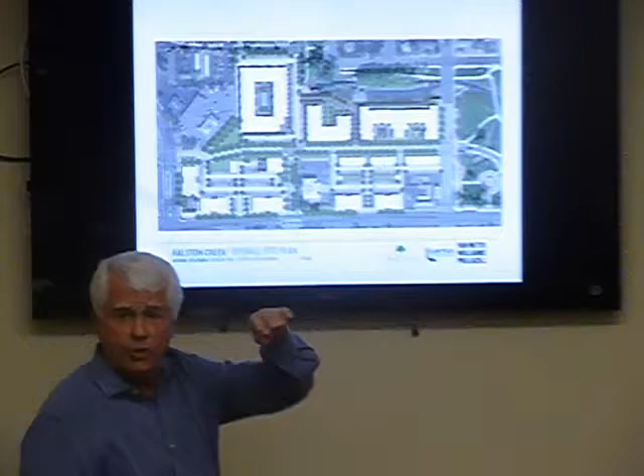I think that in the second neighborhood meeting, this was shown, and everyone kept saying, you're sure you're gonna do the Safeway building and you're gonna do the deal, and we said, yeah, we're sure we're gonna do it. We're absolutely sure we're gonna do it, but it could be, sorry, I'm okay, it could be something that could come up that would change it.

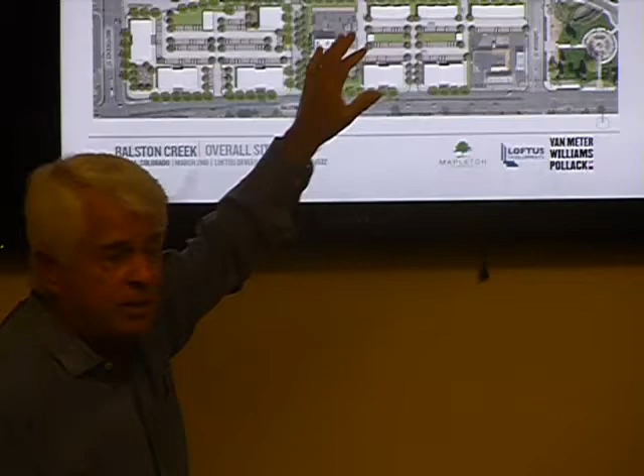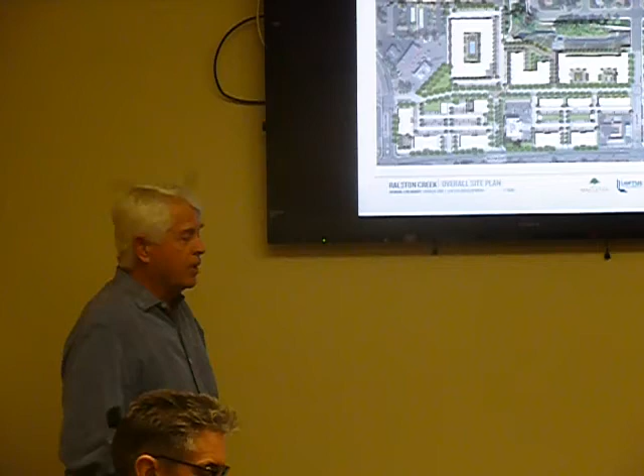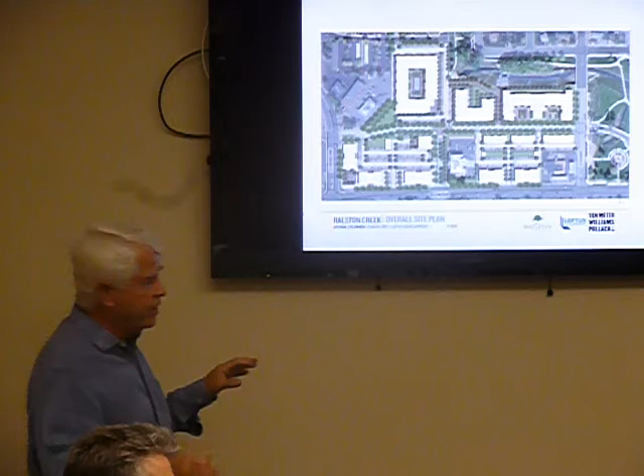And so Tim drew this, which was showing all residential units. What happened as we worked our way down, we got to the end with the lease agreement with 24-Hour Fitness, is that it became totally uneconomic for us, and that we were not driving the deal anymore. They were driving it and trying to drive the rules and regulations for the center and cross easements and how things would be monitored.

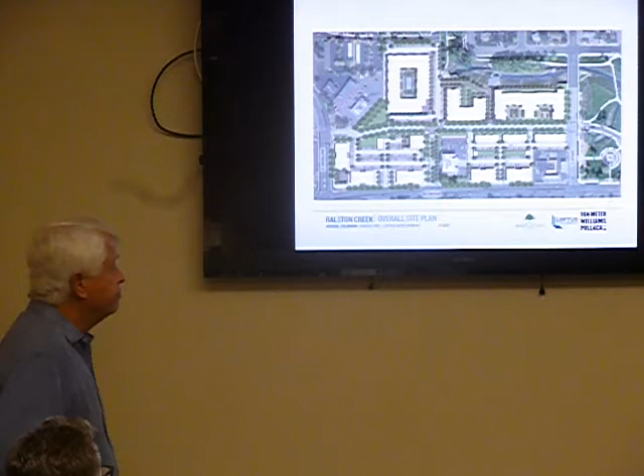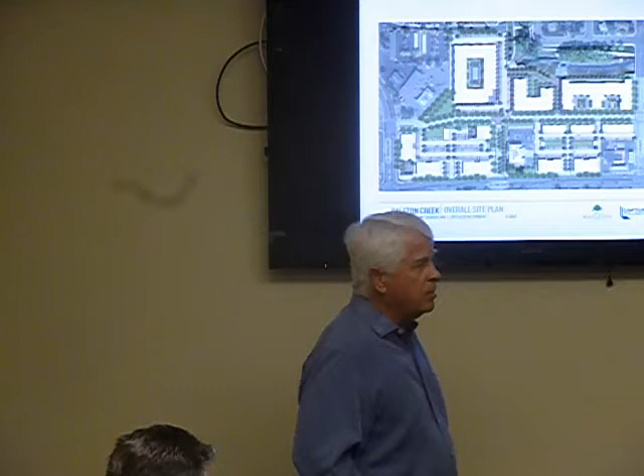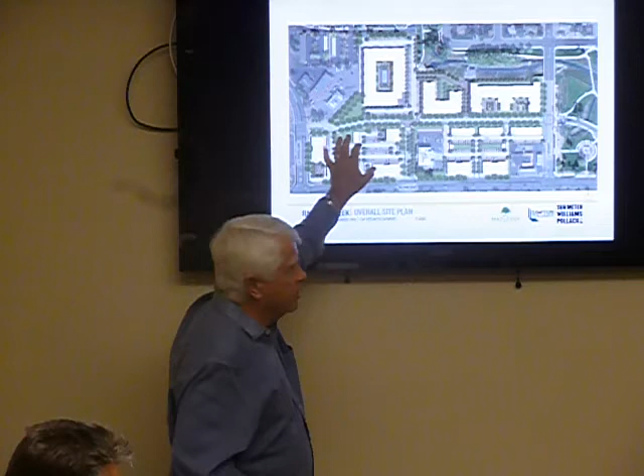And I think when this was drawn a number of months ago, some of these buildings were a little bit smaller. So what we will be going to the city on, to the planning commission on Tuesday, is just this. So, yeah, about 30,000 square feet of phase 1.

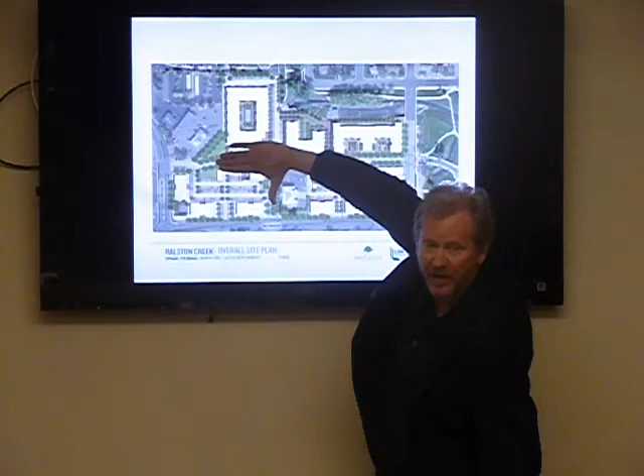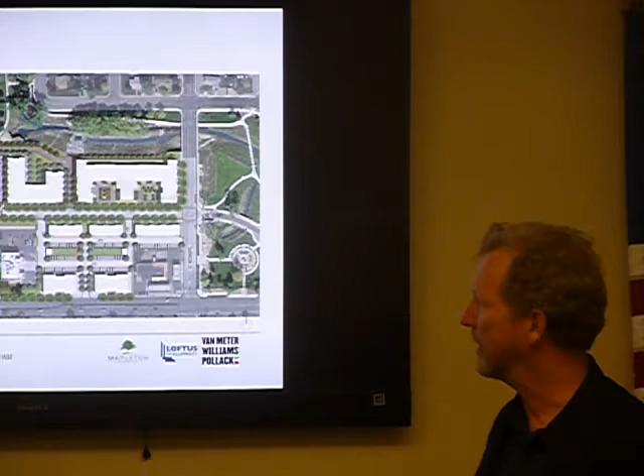So Jim mentioned phase 1 has gotten smaller, which of course means phase 2 has gotten bigger. And so we're working on both simultaneously right now. Where we are right now, as Jim mentioned, come Tuesday, we're down here with the planning commission to move through the jurisdictional approval process. And I'm going to come back to phase 1 at the end of this little discussion, because we need to ask some, we need to let you know what's going on.

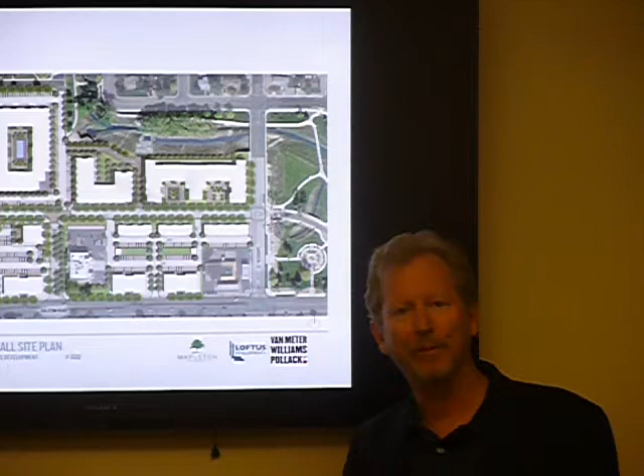We need to ask some help, I believe, on some interesting issues. So we're in technical drawings right now. We call them construction documents for the buildings and for the site, and it's getting extremely fine-tuned and getting very close to being able to put it into the building department to pull a building permit.

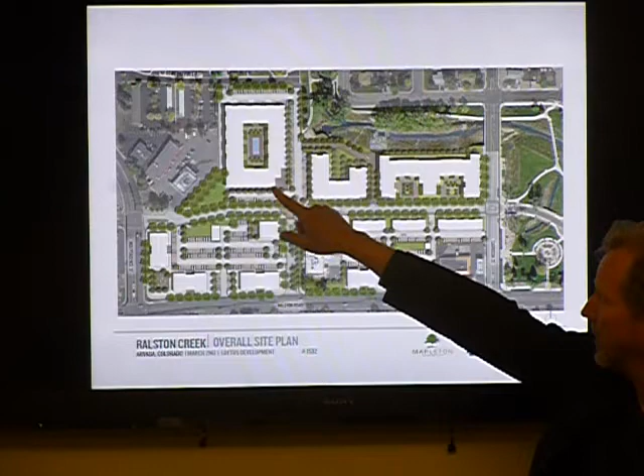So pretty far down the road here. At the time of the death of, I don't want to... of this piece up here, Jim says, okay, let's look at this thing as residential. We did this early drawing for that. But it was more than that, and I'm just gonna show you a progression of the work.

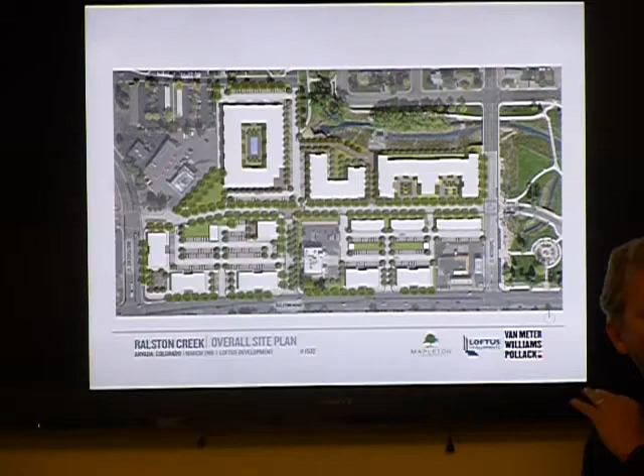The building, the drawings get less and less graphic and a little bit more diagrammatic as we go along. So I just want to show you a progression of our thinking of where we are right now. You know, this funny little sketch was, well, Jim, what happened, and Jim was saying, Tim, what happens if we now place all residential here and this idea of a large format store down at this end now, instead of being over here.

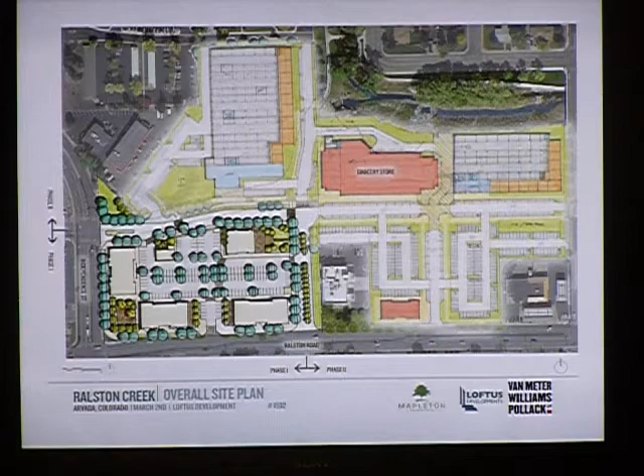And this is just showing a sketch of how it could lay out. What the sketch doesn't show is what's on top of this, which is, you know, dwelling units that's on top of this and here and here.

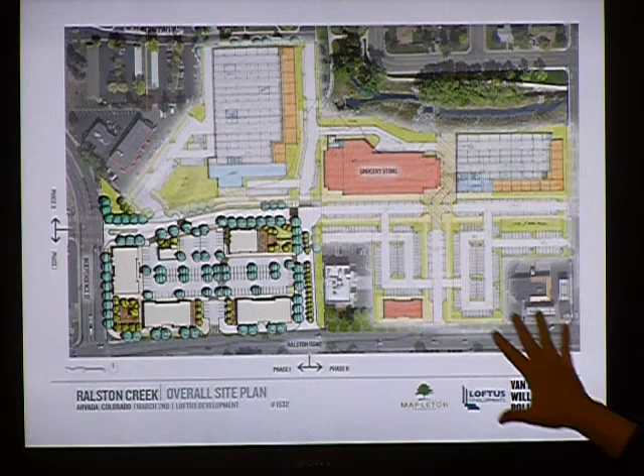So a little bit different configuration. You see these buildings moved a little bit too. And after some discussion, Jim says, hey, let's keep moving forward.

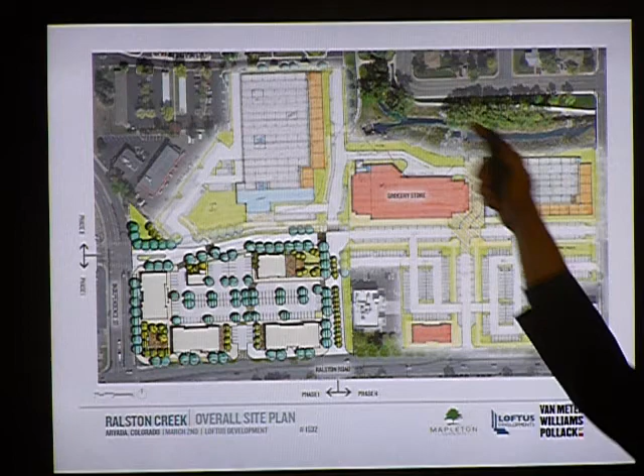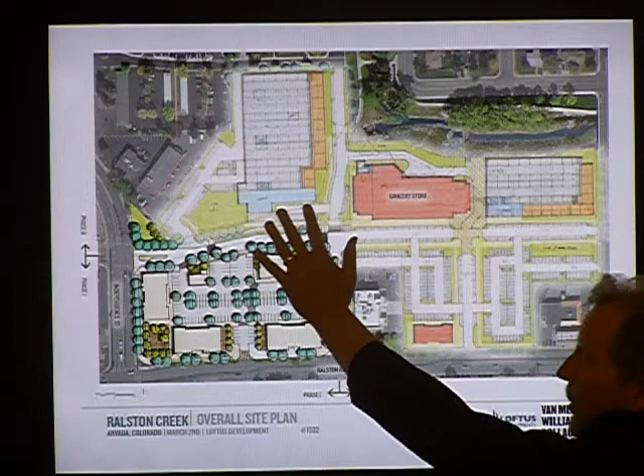So we've moved into a concept design, schematic design exercise for this site. Again, looking at mixed use, a high degree of residential, but also trying to replace our lost commercial component from back over here, to keep in intent with the original intent of this area as a mixed use community.

So now this is where we are just a couple of days ago from a site plan perspective. It looks like a lot of parking, and it is a lot of parking. But what you're not seeing is the high degree of buildings sitting over all this.

So we're right now looking at 4 fairly large buildings, named very stealthily 7, 8, and 9. And this one we haven't put a name to yet because Jim doesn't like it yet. But we're still working on it.

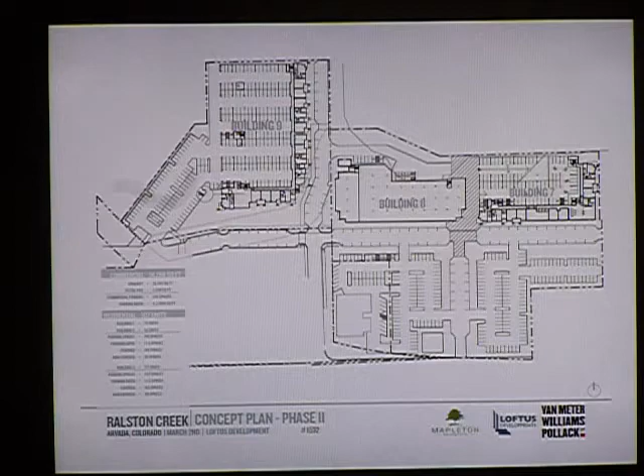But we're looking at about 300 dwelling units here now. And not just 300 dwelling units, but I believe we're up to 35, 36, 37, 38,000 square feet of retail to bring back to the site, again in conjunction with what's happening over here in phase 1.

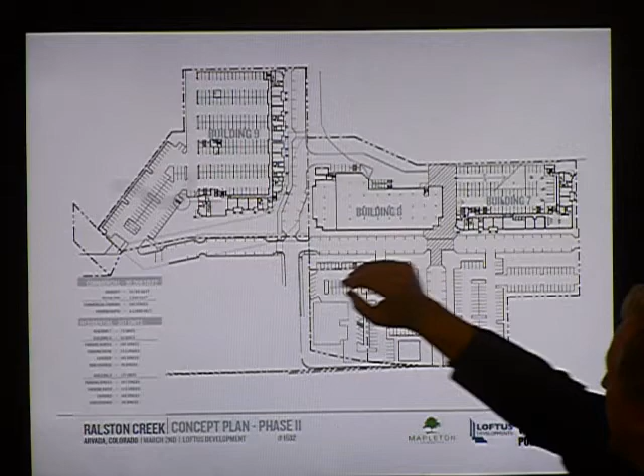So we're looking at a fairly robust set of buildings on the back here, residential, mixed use and residential, and then the parking facilities for the residential, which are covered for the most part in structures or parking podiums, and then a parking field that sits in front of our mixed-use building at this location. I'll just go through these quickly so you can see what we're up to.

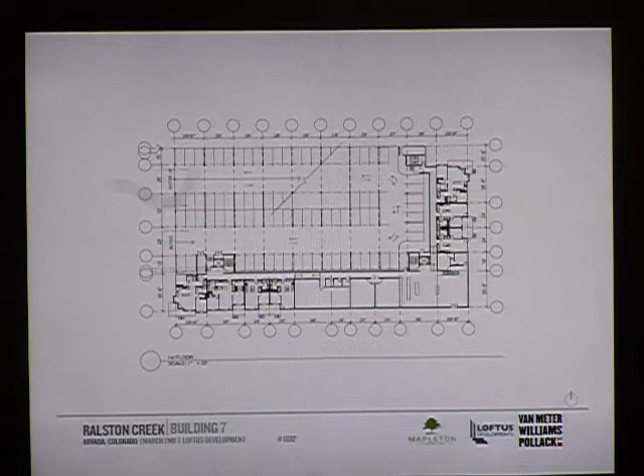First building, 7, when we go back, I'm going to move from here to here. Building 7 was the Parkside building. This is going to hold a major amenity package for the residences. That will be here, and that's what you're seeing on the first floor.

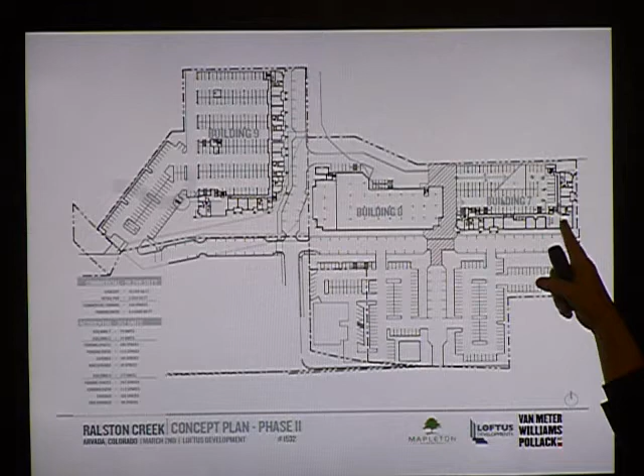So the intent is to feel like a retail building with residential above. Though the majority of our lobbies, small theater, workout facility, and the things that come with these type of things, we're putting on the park side. So this relationship over to the park here is very important.

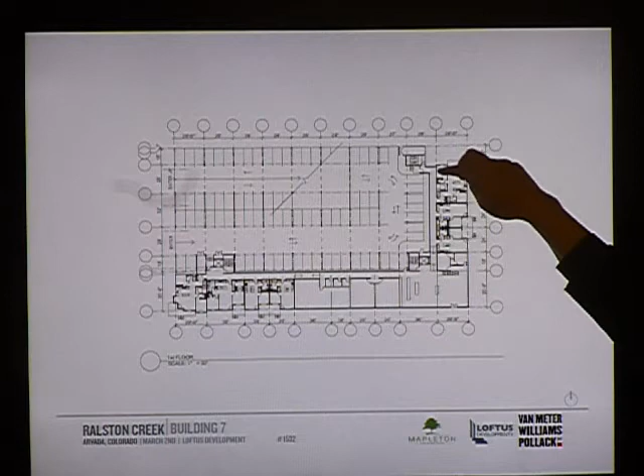And this building's kind of shaping up like this. So you're seeing a series of what we call liner buildings. Again, like what we've done over here at the park here in Old Town, putting a series of walk-up residences here and here, with our major amenity package sitting at the corner.

And what that's doing is masking a fairly large amount of parking, a 2-deck parking structure sitting up here. This goes up 2 levels like this. On the second level, this fills in with residential up here. And then we get up on top to a podium level, which will have a large podium deck.

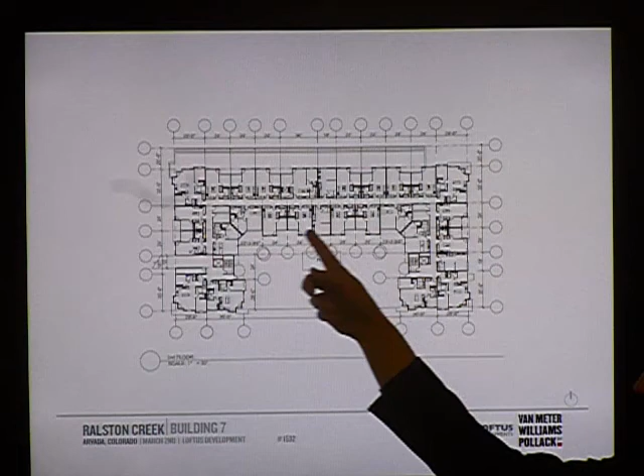2 levels up in the air, so the views will be spectacular. Drop a pool in, have a series of amenities, fire pits, and outdoor eating areas and things like that for the residents that now sit in this building.

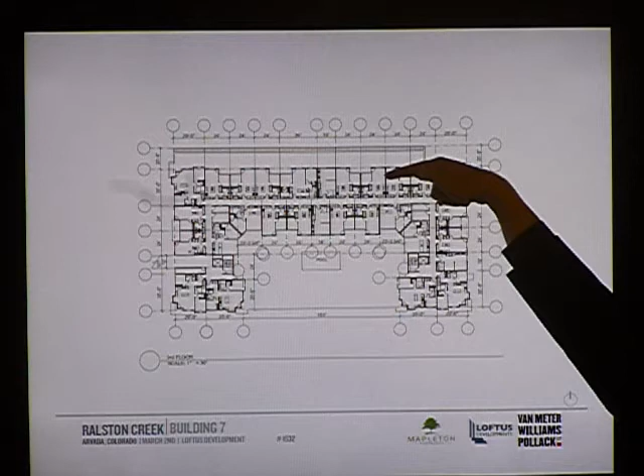The residences do sit back about 20 feet from the edge of the building. That's the parking below. So we start modulating back away from the creek side to give the building some edge and some form to it.

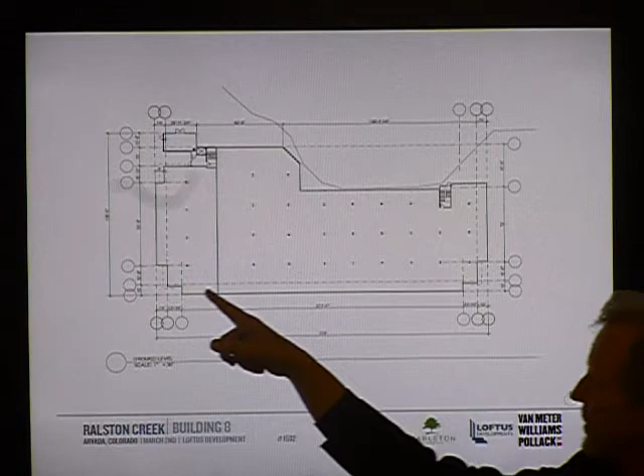The mixed-use building is a large retail space, and right now, potentially a food provider here, with storefronts along the front, maybe a major glazed entry here, smaller user at the corner here, a sub lobby here for the residences adjacent to the old Safeway building now.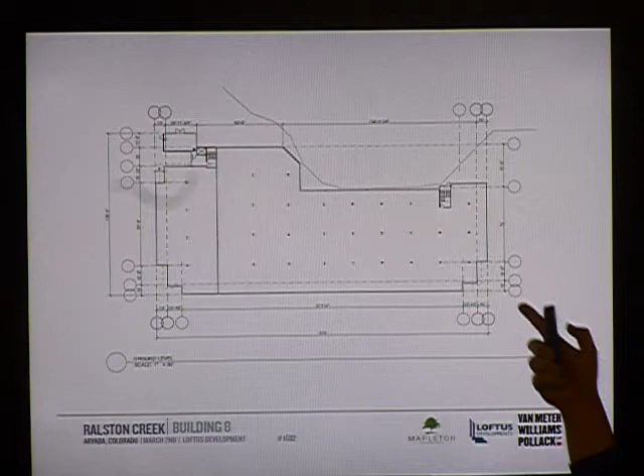This little funny line you're seeing in back is our 100-year floodplain, so we've got to be out of that. It's starting to shape the building somewhat coming across. But it's a high degree of glazing across the front here.

To activate that, we have 2 levels of residential sitting on top, double loaded corridors, a series of 1 bedrooms, 2 bedrooms, and a few studios. We set back 10 feet on the front side here to really give the retail a pronounced effect.

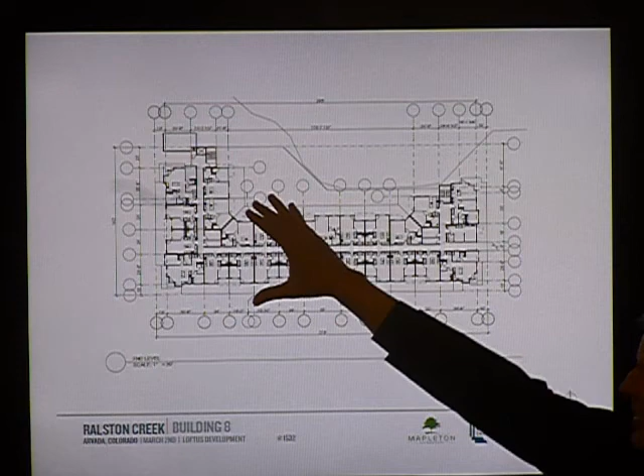And again, it sits right next door to Building 7, which is also a fairly robust building form, so we're starting to add some critical density and critical activity to help activate these retail spaces. Last but not least is a really interesting building, kind of turned with north this way, what we call Building 9, which is a large parking podium to cover parking, so each resident will have a covered parking space underneath.

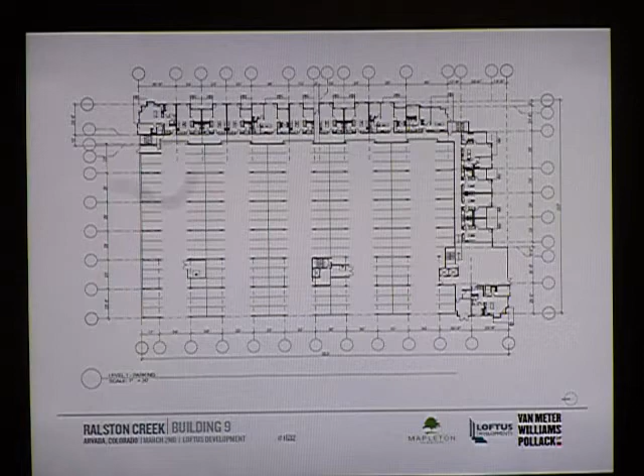Again, lined with walk-up housing. By walk-up, I mean you're outdoor, you come up into a porch and up into the unit, or through a corridor through the back end. Coming down here, that faces out towards our phase 1, and again a sub-lobby level right here. This is fairly remote from Building 7, so we do have some amenities right here for Building 9.

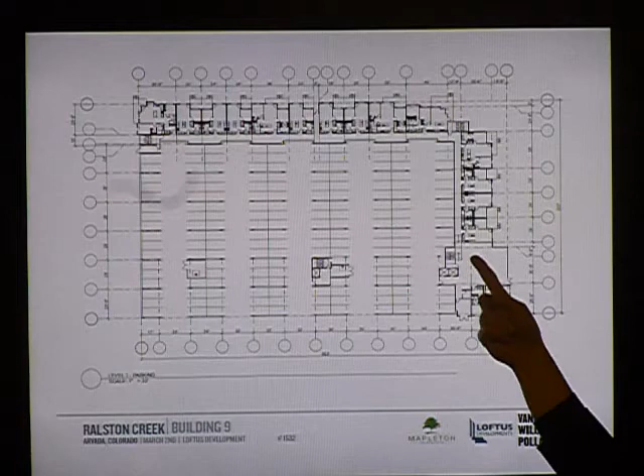It moves up and creates a really unique shape of two very large courtyards—very large. Have most of you been to Park Place and seen those courtyards? These are double the size. One facing due south, looking over phase 1, one level up in the air, and this one looking right down the spine of the watercourse-way, Ralston Creek. Again, these will be heavily amenitized like at Park Place with a variety of uses out there.

And we go up 3 stories just like this. So right now we're sitting at about 307 dwelling units, a variety of dwelling types—ones and twos and studios for the most part—covered parking, and about 38,000 square feet of commercial retail opportunity within that.

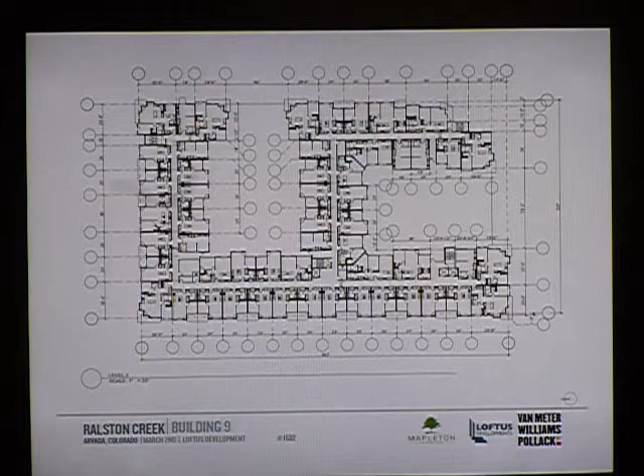I'll go back to the site plan here. I know it's not sexy, but this is just printed right off our computer about where we are today. We're moving forward in a fairly aggressive design pattern right now. I'm looking forward to trying to get a PDP maybe towards the middle to late parts of April, first middle, for the full development.

So before I go on to the really interesting discussion, do you have any questions about this that I can help answer?

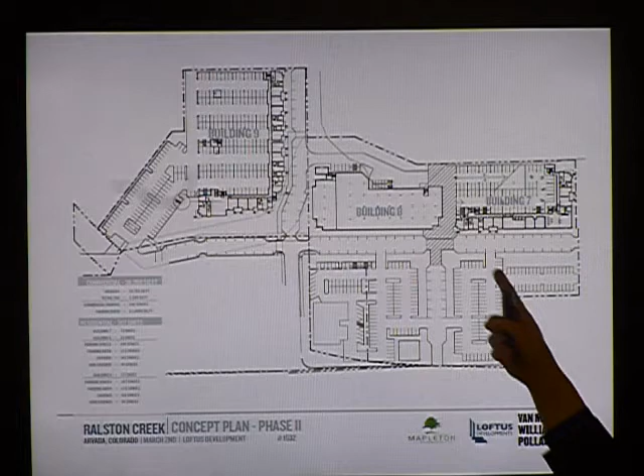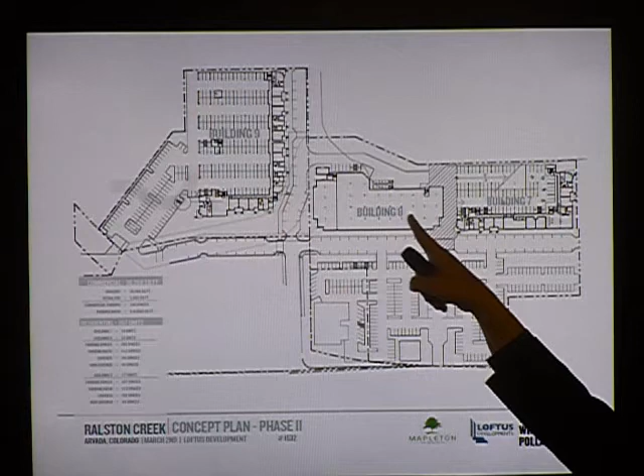So the rest of it's just parking. Pop it up here—this one right here? Yes, that's parking, that's all parking. The thought is we need a few more parking spaces. We're not getting into the structure; this would be reserved for the residential at this point. The little site just to the west of that is just surface parking as well, because this is all serving this—parking at about 5 spaces per thousand. We're keeping a good view corridor back to here, because as a fairly large user we need to be able to pronounce it back out to Ralston. This is the urgent care facility, and we have a co-share parking arrangement with them at this point.

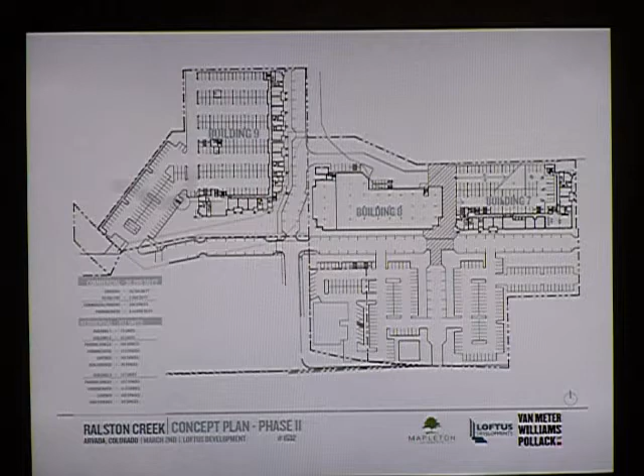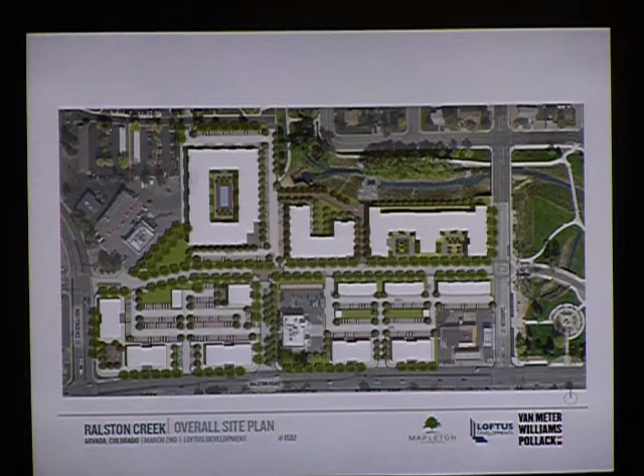What's the street situation going through there? It's a street situation, parking on both sides, necking down to about 24 feet wide—just enough for a fire truck and two cars to pass by, at a 5-10 mile an hour condition. Going back to the original site plan, that street really remains the same throughout, shown by the color lines. So it'll be the same throughout the entire process, but now we're getting into the details of the building, so we can figure out what the yield is and how to park it.

It just appeared narrow. Well, it is rather narrow, and the intent is it's very slow moving, with parking on both sides.

So phase 1, are you still anticipating buildings fronting Ralston? Yeah, this is where we are.

And then for the eastern part, buildings 7, 8, and 9, where the parking is. So now we don't have the buildings fronting Ralston, that's gone, now it's smaller buildings and parking. Right, because the majority of what we were showing previously, we did not have retail back here. We had retail all up front, and we co-located back here so they get a larger user back there.

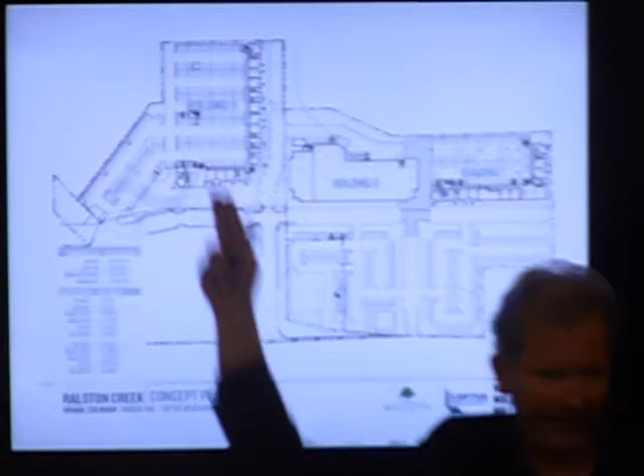And then you use the term covered parking, is covered and structural parking the same? Yeah, this is a parking structure, it's 2 decks. This is a parking podium, it has a concrete lid over it, and that's what gives us our courtyard.

So we feel there's no restaurant capability on the east side of the property facing the park at all? We've got the residence parking right now. Oh, right here? So there's no restaurant possibility anymore? Jim, did you hear that?

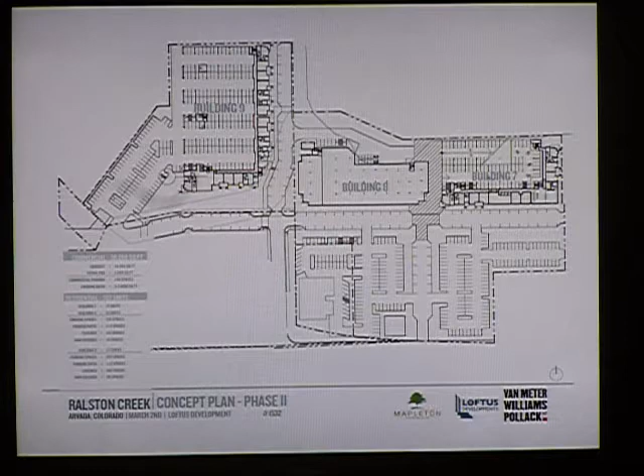You want to answer that? Well, right now we're not showing anything there because in order to park the residential, we're about 30-some spaces short of what the apartment brokers are suggesting is the ideal parking arrangement, which is 1.5 spaces per unit average, and we are at about 1.4 something. In terms of something being planned there of some significance, we've kind of taken a pass on it.

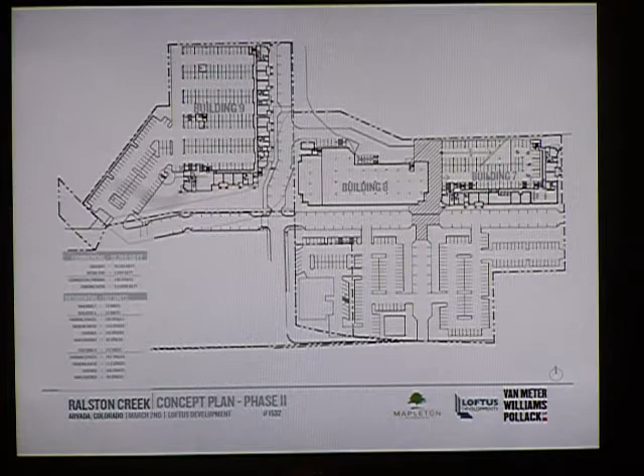Because of the gas station and not exactly knowing the future of the gas station. It is different around the country.

If you were to point to the corner of Building 7, just where the entry is, could there be a coffee shop there? In my world, it would make more sense to have a coffee shop there, inside the building, than behind the gas station.

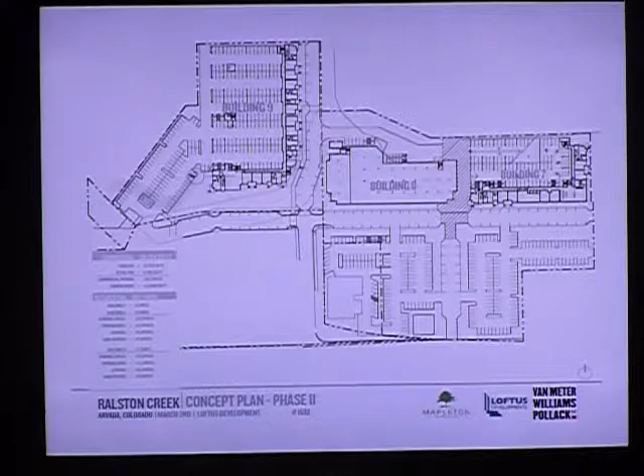Yeah, the gas station is problematic for any kind of buildings, just because it's unpredictable how long it's going to be there. It's just a real eyesore. Nobody wants to be next to it.

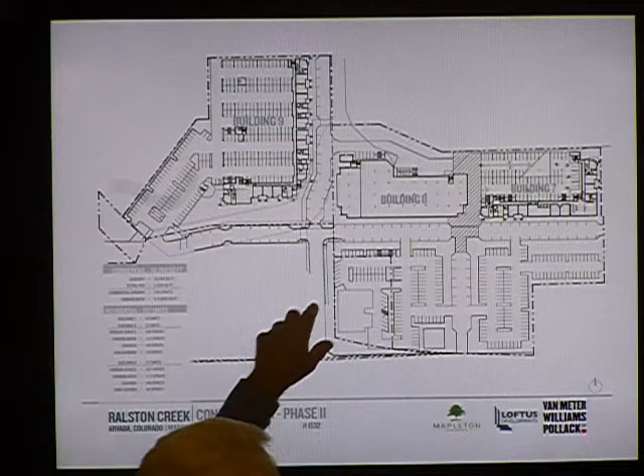So what we're thinking is that this is 2 users. This is a 30,000-foot user, and this is 5,000 or 6,000 feet.

Essentially the height of the trusses and so on is about what it would be if you were inside a Safeway store or a regular grocery store. I think we started talking about 16 feet, and maybe that is 18 feet. I don't know, but that would be grocery store height.

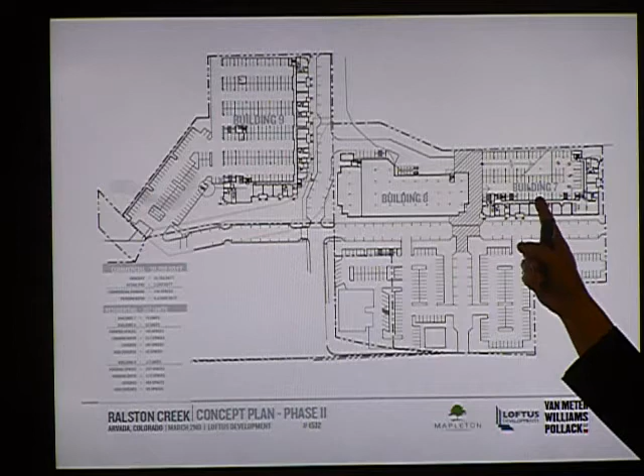These connect across in a bridge. Yeah, these 2 buildings connect, levels up in the air. Residential connects across the drive-through area there.

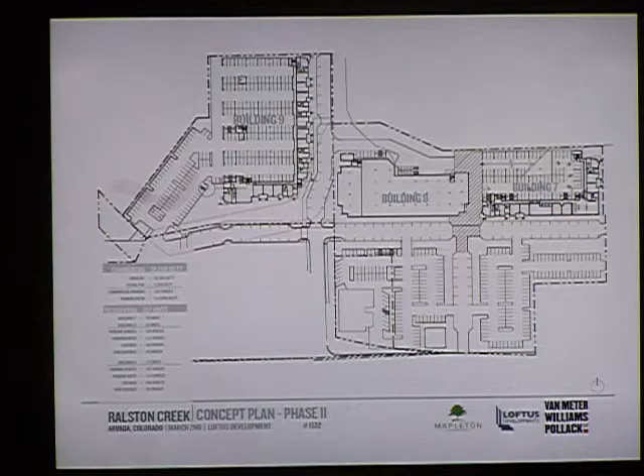And I can't say that we know of anybody that definitely is gonna go in that building, but we've kind of targeted some people that we think we're gonna go after, and one we've already contacted about going into that building.

So we've gone from having some of these buildings here to trying to get a kind of user that everybody's gonna appreciate. Maybe it's food, that also complements all the small users.

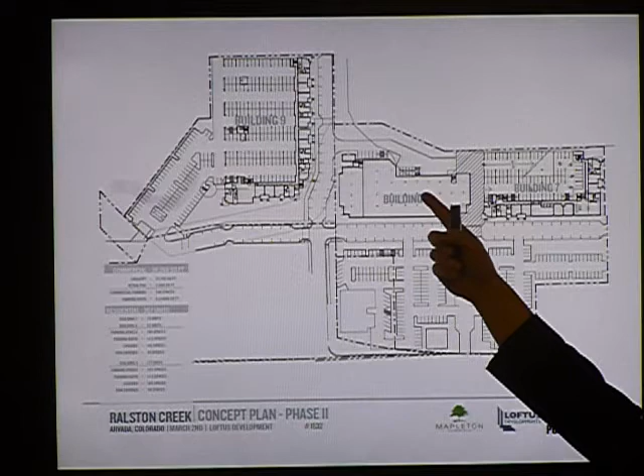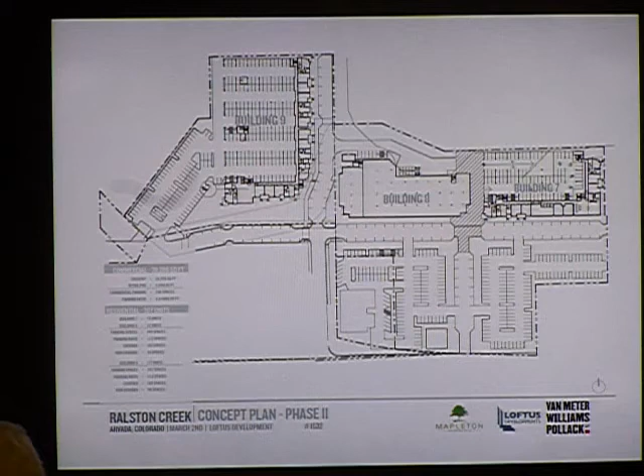Yeah, I mean, I don't think we'd want to put anything over here that competed with these guys, because we spent so much time trying to reduce footage, take away footage, because these are mostly restaurants, Cadova and people like that are interested in this stuff up here, and they want visibility, signage, and very convenient parking.

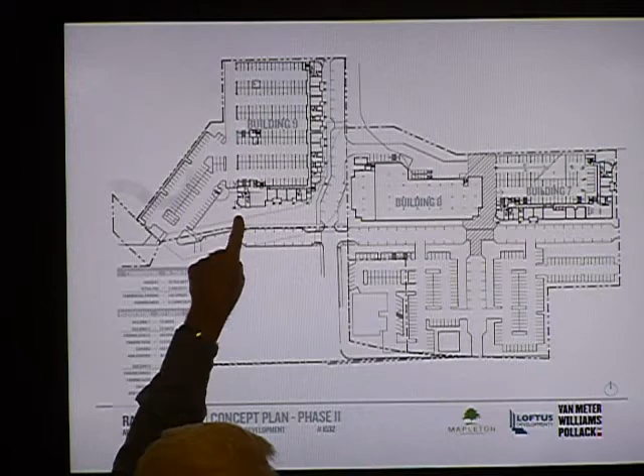And when we failed on this thing right here, then the other thing that the retailers and restaurants look for, in addition to traffic, is rooftops.

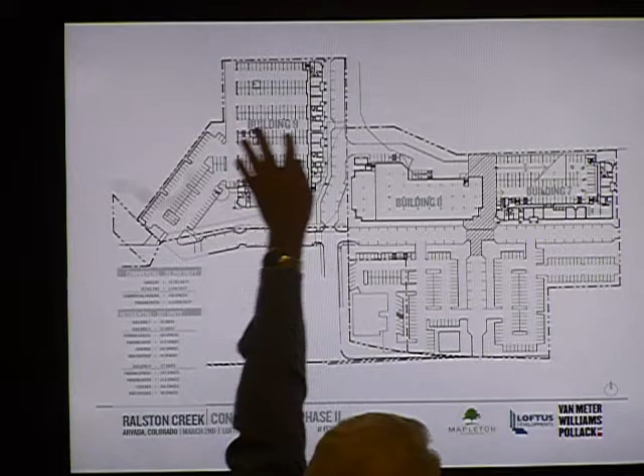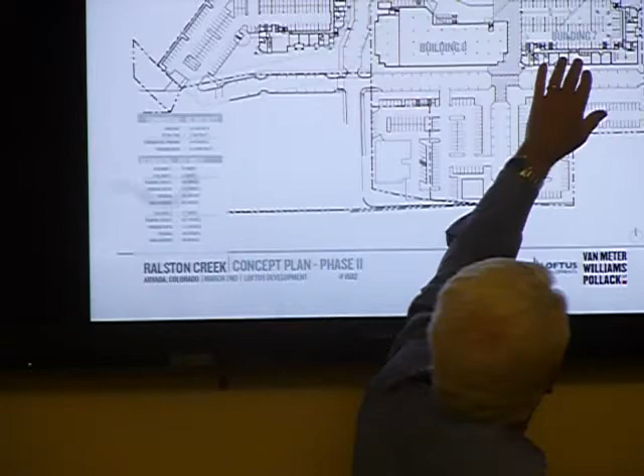And it looked like we had the right amenities to do rooftops, the amenities being the way he designed this building, with the courtyard looking this way down there. These 2 buildings have their best units behind, they look at the creek. These units here in front get the views. They're up high enough that they can look over it, so that's kind of the thought.

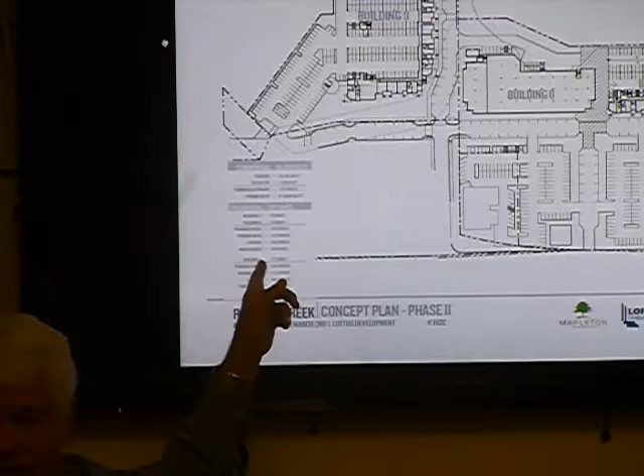Is there a breakfast place or a coffee place going on here? I don't know. We know that there isn't one here anymore.

Will we go after one? Probably, sure we will. I don't know, maybe you know that we're changing brokers. We brought a company in here yesterday to introduce them to Mo and Clark, and they spent a couple hours here learning about

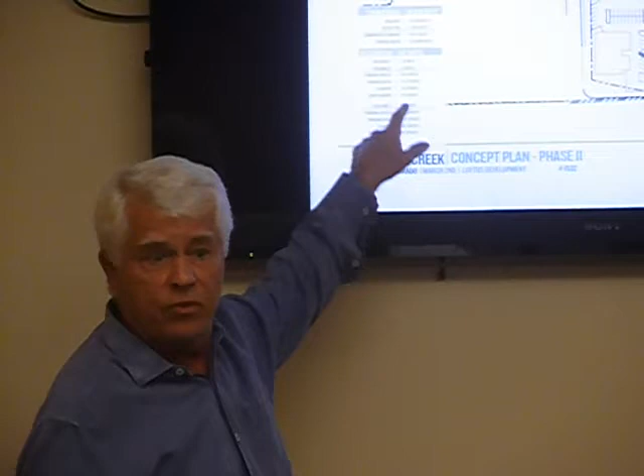the rest of Arvada. Our goal would be to have a deal done with them in a week or two. From there, we would like to have our demolition guy give us a number for these buildings, because as soon as those are vacated, we'll knock those down.

And when they're knocked down is when we'll put up marketing signs. We think it's kind of confusing to have the old buildings and then have somebody put up their sign that says for lease.

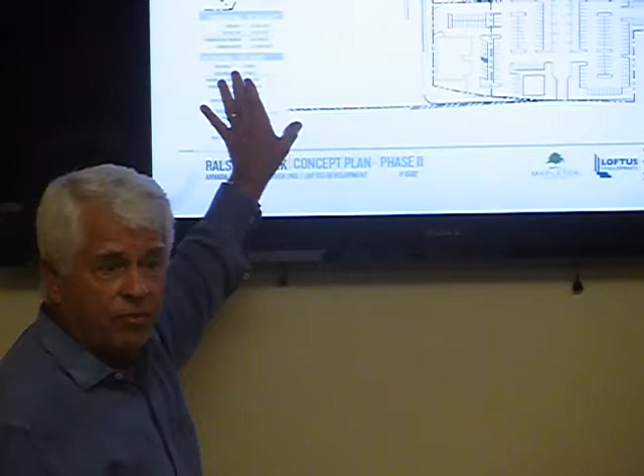Just to add to what he said, you guys all know Phil Hicks, he was here before, and that's who they're going with, that firm. They have a lot of exciting ideas about this. They want to get some of the bigger guys up there, but they also have a great relationship with a lot of the smaller, regional, local people who might have 3 or 4 locations. So they're looking to do a good melding of local, regional, and national for the retail on that site.

One thing I'd add, you said it's a fail on the 24-hour fitness. Actually, I think it's probably a victory in the way that you designed that. I think that's going to be a lot better than 24-hour fitness in the big picture. It looks better than that. Yeah, I think that's going to be...

When that was first drawn, we thought this could be kind of simple. You have an anchor there, and this generates traffic, and it ended up not being simple. So maybe what we're going to go ahead and propose, depending on what we hear, is what we're showing.

I think we did point out one thing too, is he's willing to do vertical mixed use, which we keep trying to get developers to do, and we have real trouble with that. And that center building is vertical mixed use. It is retail with 2 layers of housing above it, so which is pretty cool.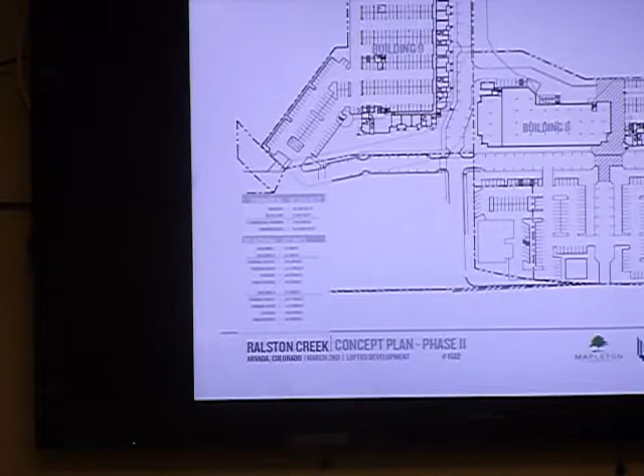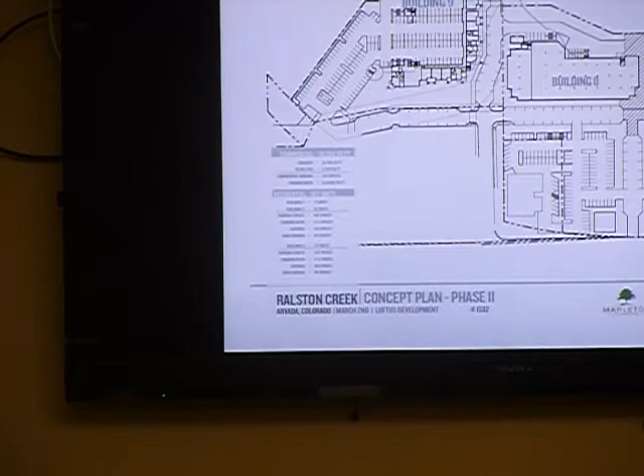We've been working hard. I know we had originally wanted to put some small businesses up towards Ralston, so we could close that corridor, and we'd had many discussions about why that made sense, and that seems to have gone away. I'm having a hard time conceptualizing seeing it there, and then to the east you have this big sea of parking. I understand why it's necessary, so I get to make wishes, you guys have to make it happen.

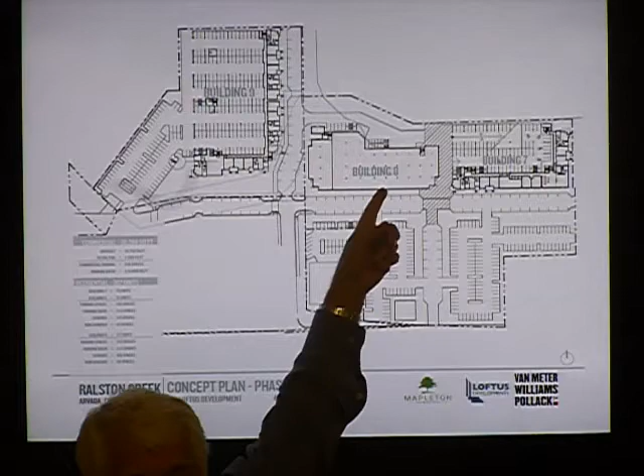This is here, and we didn't draw the gas station, so the rest of it is fill-in parking. We were looking at doing some other things, so in terms of putting the retail here, the parking requirement we were looking at for the particular bigger users was 5 spaces per 1,000 square feet.

I understand why you have to do it, I understand you have to have so many parking spaces. So basically now the jewel of the project has been moved back towards the creek, it's offset, and without really seeing what that's going to look like, how we've made up for it in buildings 7, 8, and 9, I feel that we've lost some things up towards Ralston.

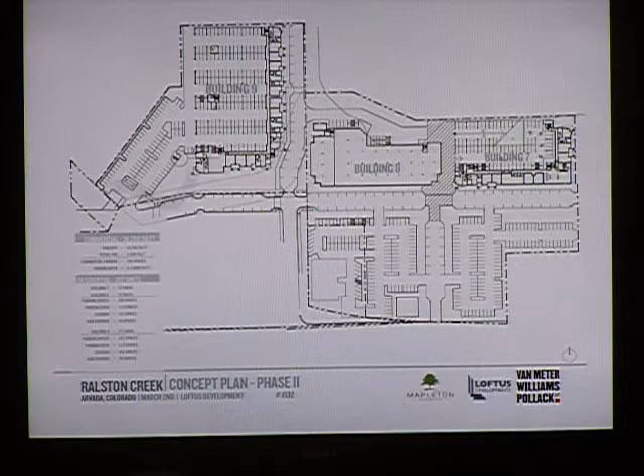Well, it's tough, because there's things we don't control here, obviously—this thing isn't going away, it's not something impacted. Whatever you're gonna put back there, you've gotta take something away back here, because you've got competing parking requirements.

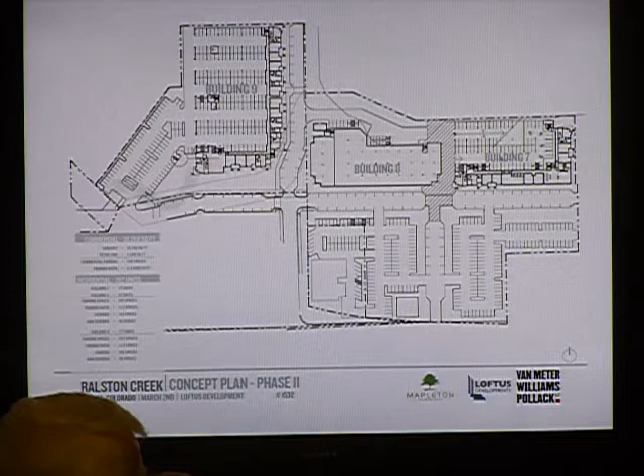And when you have the retail broker here, like here yesterday in Mullen Park, we talk about this—maybe having 2 buildings here.

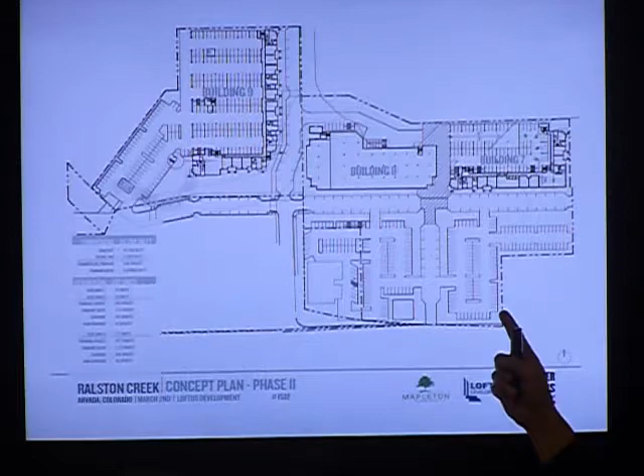So maybe you can—I'm probably the least qualified to make this kind of comment, so I'm just trying to absorb some information. You're making good observations. The key difference between this drawing and that drawing is we've doubled the amount of commercial here, but it's all co-located in one mixed-use building. Before, along this quasi-main street that the city keeps calling and we finally adopted, we didn't have any commercial—all the commercial was just in these 2 buildings. But there's a lot of questions whether they can coexist with this and this.

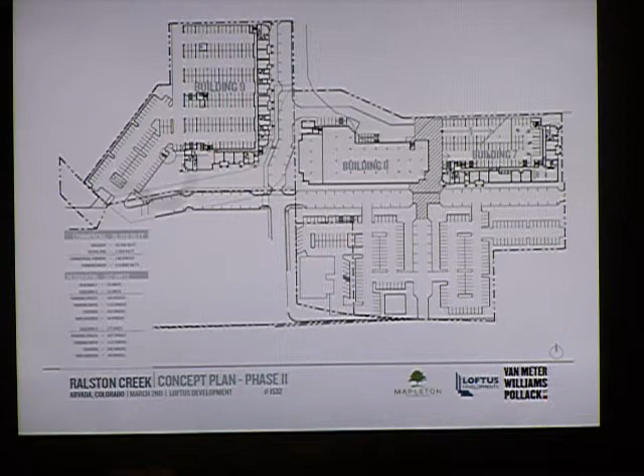So have you done any studies or gotten any information? Right now we have some buildings, we've had grocery stores that are offset that far back, and with the development across the street—you have that development across the street, and then you have this development here with the grocery set that far back.

I just wonder about the amount of traffic that's gonna receive. There's already a King Soopers, and there was a Safeway, and there was a Sears, and all of them are set that far back, and they've had some struggles in the past.

Yeah, I mean if it ends up being food, it's natural food. You can list the names of those folks that are out there and the sizes they're looking for—maybe from natural grocers of 16 or 18,000 feet, to Sprouts and Lucky's. It's 30,000 in this box, and 6,000 on them.

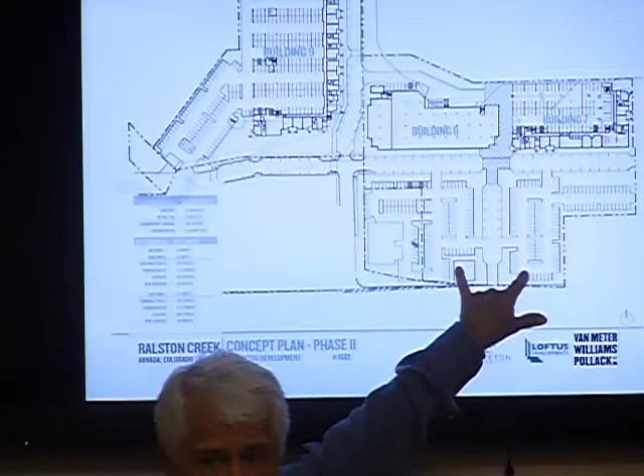And it might not be that, if you did move one of those stores up front. Like if you had, say, a natural grocery store at 18,000 feet, and you were trying to put them up front—my opinion would be you wouldn't have this, you would just have that store here. There's nothing wrong with having the parking field behind it, because that happens in a lot of places, but you've eliminated any other visibility for any of the rest of these guys.

I mean, you're the first people that we've shown this to other than ourselves, and we just keep patting ourselves on the back—it's wonderful, so.

And I'm not coming from a good place tonight, so you have to accept that. I'm sharing Tony's view—I am not liking that parking field there, considering what's on the.